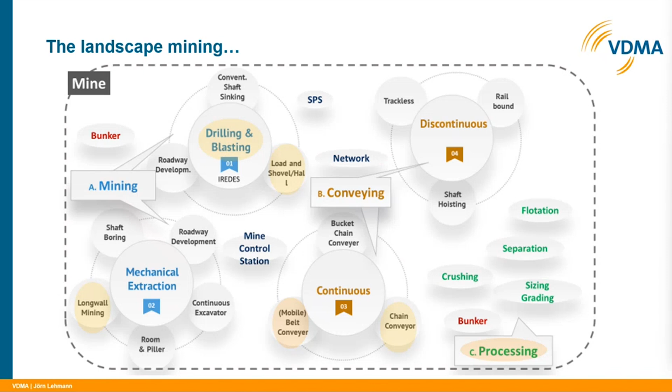This led us to our joint working group and the organization form we established, because there's no single important machine in mining we could start with. Our starting point was the interest of our members to join a specialist group and create the first steps or the first companion specification for their special interests.

For example, in longwall, in mobile machines, or IREDES - that's the international rock excavation data exchange standard. This standard is already established in the mining community, and we didn't want to redevelop things a second time. So we tried to get these initiatives integrated into our working groups, so everyone has the possibility that the mining companion specification will meet all the requirements from the different stakeholders - from the mine operators, from the automation guys, from the integrators, as well as from the manufacturers of the mining equipment.

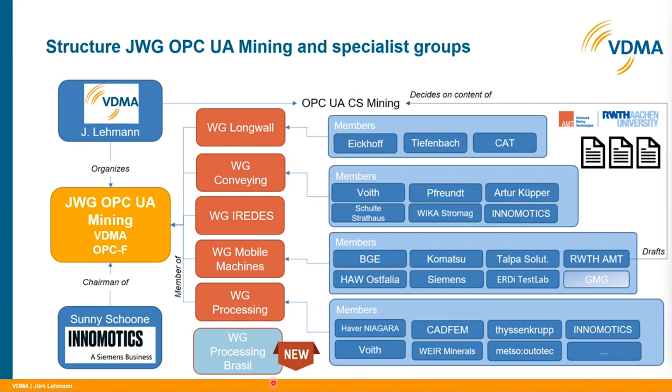I'll point out that we now have a new working group in processing, in cooperation with SENAI, an institute for education in Brazil with strong connections to mine operators. I will come back to this at the end of our presentation.

So let's come back to the mining landscape image and show you what we have already done with our mobile machinery. We have use cases developed in loading, unloading, positioning, and queuing for mobile machines. We also have the Longwall with, for example, the Shearer Advanced. That's it.

For example, the horizontal control for a seam in the coal mine, and with our working group on IREDES with a drill rig mapping. We have ongoing activities on the side of our working group on conveying and processing with, for example, condition monitoring or screen overload. In total, we have developed at the moment 21 companion specifications with our specialist group here in mining.

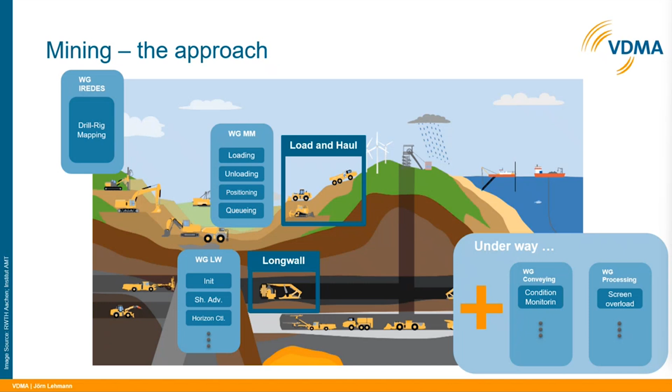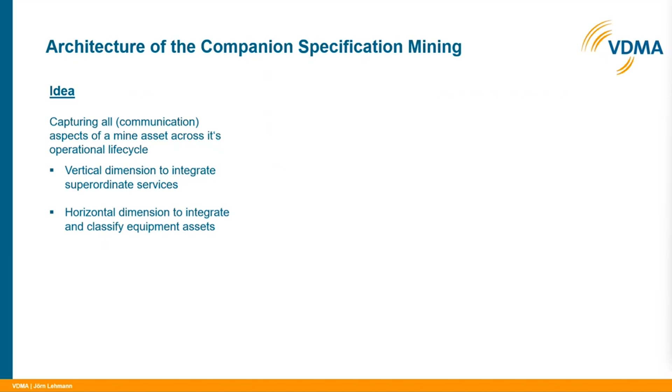What is the idea behind the architecture of our companion specification? We would like to capture all the communication aspects in the mine, in the vertical as well as in the horizontal aspects.

That's our view of our assets and system that we want to integrate in our companion specification, coming on top with the planning and logistics services, operation and execution service to the monitoring and supervision services. And at the bottom, we have all the extraction equipment, the loading equipment, or transport and dumping equipment. So we try to integrate the whole mine with our OPC UA companion specification.

The idea behind is also to give the mine operators an easily understandable companion specification, so they have no difficulties to implement parts of our mining companion specification instead of being forced to integrate the whole companion specification of the whole mining. We think, and that's our idea, how we manage all this and develop it in a manner that mine operators can take a look at our companion specification and decide for their process, trying to get these information models or companion specifications integrated that they need, and not the whole mining companion specification in total.

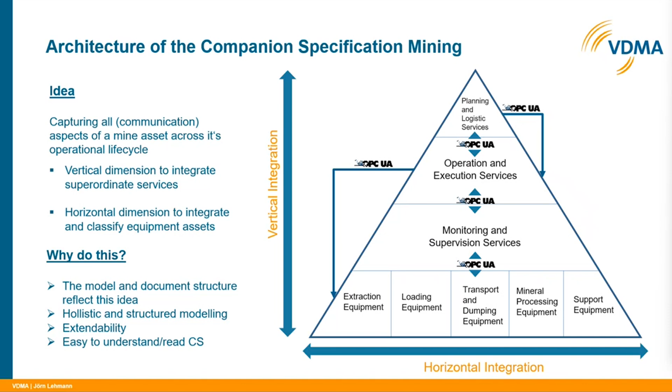So how does the structure of our documents look? We have on top the mining general document, which is more or less the information and introduction and explanation of how to read our mining companion specification.

Then we have a part for the application and use cases, so everyone can take a look at what kind of use cases are developed in our companion specification and have a short overview if it's usable for their special mine operation, for example.

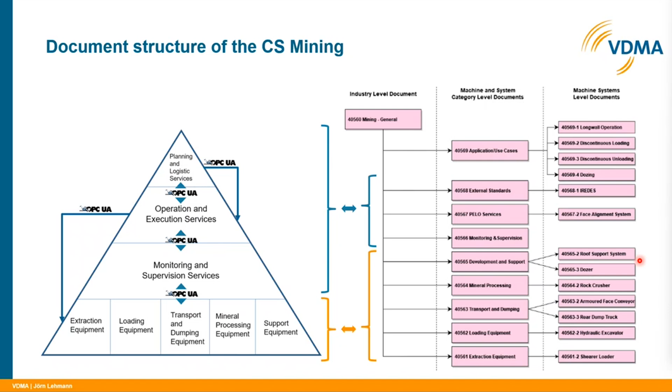And then we have the upper parts for the systems, like external standards or the planning and logistic and operation execution systems, the monitoring system, and then we have all the stuff for the machinery and equipment that is now divided into extraction, loading, transport, mineral processing, and support equipment. Here you can see we have some of these systems already developed, like the rock crusher, the armored face conveyor, or the rear dump truck, for example.

So the documents are available, and for us it's more important to give you the possibility to use them in your environment, so you can receive the documents via the VDMA internet website or through the OPC Foundation with the node sets.

The easiest way is if you go there and search for the numbering, or give the input or search word for mining, and then you can receive all the mining standards that have been developed by now.

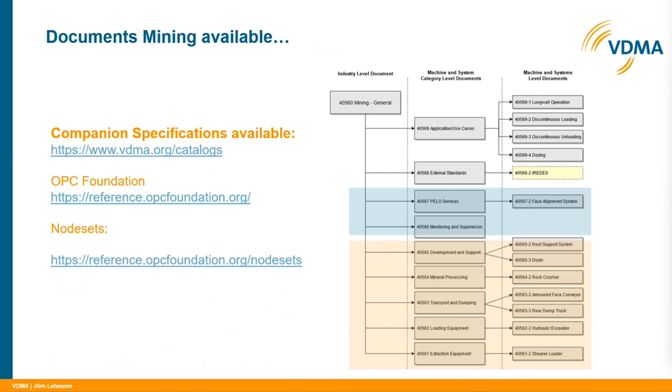So that was a short overview about the work that has been done. Now I'm coming to our ongoing work with conveying and processing.

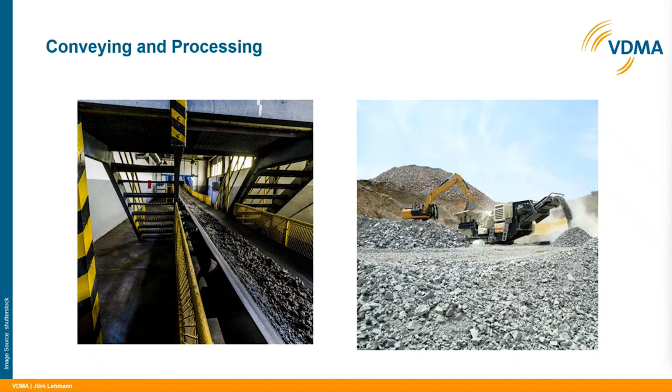We started this topic with conveying and processing in one specialist group. You see in both of these images a conveyor, but at the end, the groups decided to divide it into two parts, the conveying part and the processing part, to be sure to develop the requirements for each specialist group in a manner that it will not get too complex.

So you think maybe a conveyor is an easy and simple part. Let me give you an overview of a conveying system. It's more or less a system with different types of devices and machineries, like a winch, a drive, the belt, the idlers, the belt scale, the frame, and we have the belt cleaner as well.

These conveyors are also integrated into upstream systems, for example trucks, which are for the loading, or a crusher, and for the downstream, other conveyors give the material to a crusher, a grinder, a mill, or a silo or bunker. Most of the bigger conveyors have communication with superordinate systems like a SCADA system or a weather station, and in the future, most companies are thinking about a digital twin.

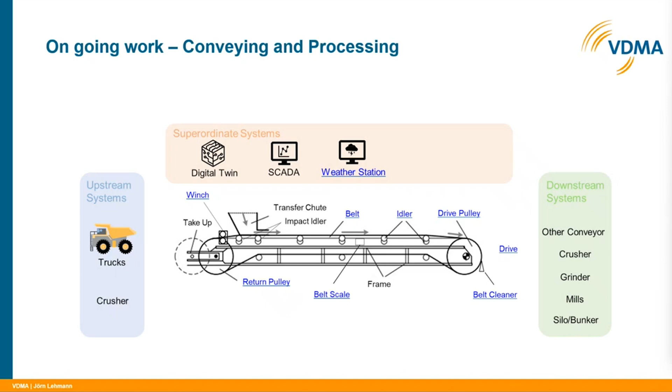Thank you, Sunny. And as Sunny mentioned, in our working group we have different types of companies. For example, Artur Küpper is a manufacturer for idlers. Becker Mining is an integrator and control system manufacturer. Innomotics, Sunny, I think you can explain better than I what you are.

Yeah, in the end this is a good example. Innomotics is formerly known as LDA from Siemens AG. We supply electrical components, motors and drives, and automation systems for all the different aspects of machinery in the mining environment. But this is exactly the case I mentioned before, and this is the beauty of our VDMA initiative under the lead of Jörn, because we are bringing OEMs, technical suppliers, end customers, and high-end technology providers together in one group to openly discuss how we could work in a professional way together into the future, to really come to a digital mine for our end customers in the mining market.

And then we are more or less clearing a little bit the borders of proprietary systems, which is what's been avoiding this flexibility. But as we think, or we believe, and even our group members believe, that only if we work together into the future can we really reach a high-end digital mine, or mining of the future.

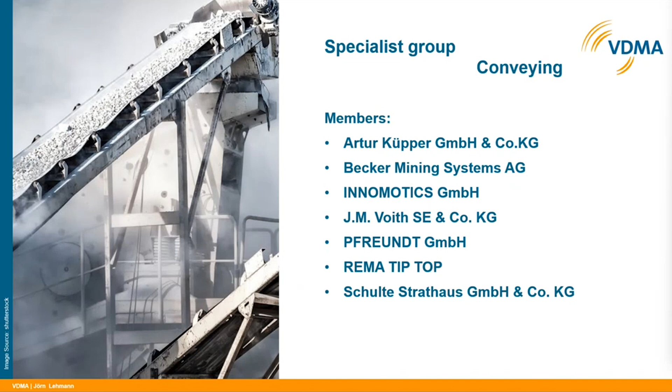So we have developed several use cases in this working group, and we had to prioritize them. We have prioritized 6 use cases for the first release, which we would like to release in April 2025 for bauma 25, and show them to all the visitors of the trade fair. Maybe I'll pick only 2 of them.

The startup procedure is a use case for the regular startup of a conveyor belt, so that the conveyor belt starts as gently as possible in order to avoid unfavorable dynamics of the belt tension, and not to give too high or too low belt forces that lead to damages or loss of the material that's on the belt. And the second use case would be, for example, load sharing.

That's in the normal operation, the stationary operation. If you have several motors, if you're talking about a long conveyor belt of kilometers and kilometers, the forces of the different drives and the required speed, mass flow, and power of the local drives need to be adjusted so that the conveyor belt is running smoothly, depending on the mass flow of the material that the conveyor belt should transport.

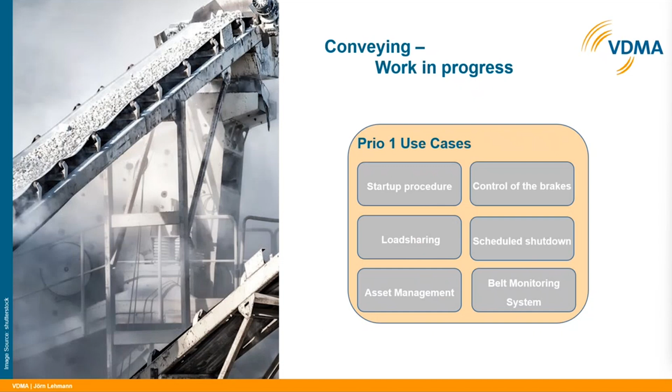Then we have priority 2. These priorities are the lower points or the use cases that are not the essential processes of a conveyor belt, like the conveyor KPI or the pulley utilization time. These are information that's interesting for the customer, but he can't calculate them. It depends on knowing about the load, the speed, the cleanliness level of the belt, and the state of the belt, for example.

And for this calculation, the use case needs, for example, the data from the belt speed, the mass flow rate from the belt scale, the cleanliness level from the belt cleaner system, the belt wear rate, the bearing temperatures from the pulley, and the belt tensile force from the tension station, for example.

So you can see, as Sunny told, you think it's a simple system, but at the end you need very much information to get more information for the customer, and this information should be shared between different manufacturers, at the end in a superordinate system, for example.

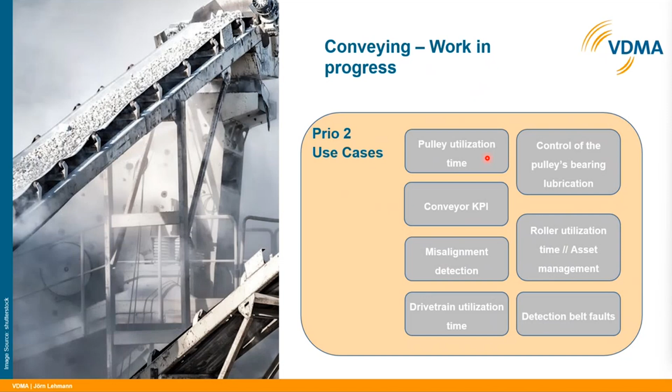And now we come to our specialist group on processing, and it's the same as in conveying. We have different manufacturers with different knowledge, manufacturing different types of processing systems, like Weir Minerals, HPGR, or Steinert GmbH, which provide sorters of different types, or Kleemann for mobile equipment in the processing industry, and so on.

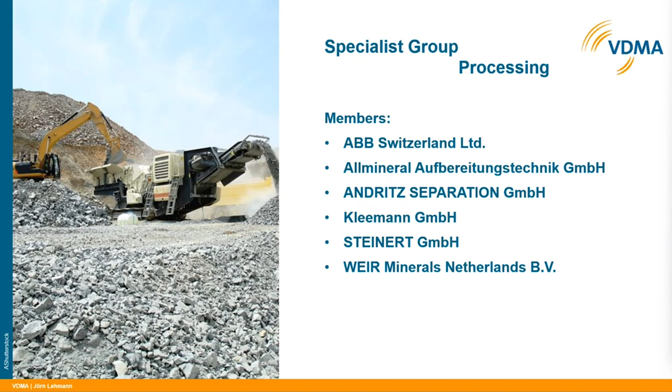So this group was formed by themselves, because they are interested to get communication between their different types of machinery and to give the mine operators better information about the process and about the condition of their machines at the end. Because in mining we have no full liners at the end, so we need communication between the different machines, as Sunny told us. We need a standard for that communication so the mine operator has at the end a benefit from this communication, automation, and digitalization of the mine process.

The ongoing work in processing is just in the first step of developing the use cases. They're now defining the data for the communication between the different machines and systems, and they check existing companion specifications for the usable concepts that they'd like to use.

For example, for the energy consumption of a machine, for the process, or the condition monitoring, or the job monitor, or the counter for the process and the time.

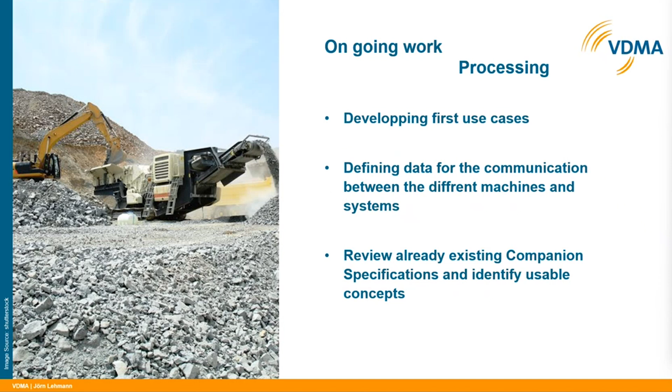And the second meeting had about 30 participants, where we decided to start the process now actively. They are working in Belo Horizonte, led by Senai, in the first working group, trying to develop the first use cases together with the mine operators, to have more and more involvement of the mine operators, so that we all together gain more insights into the requirements of the mines, to establish and develop companion specifications with the requirements from the mines as well.